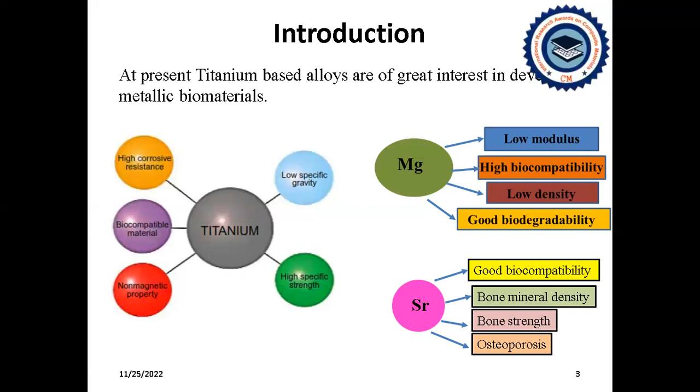The addition of strontium and magnesium to the titanium alloy not only increases biocompatibility, it also helps in corrosion resistance and degradation, and it slows down the rate of degradation. Therefore, the possible application of the ternary titanium, magnesium, strontium alloy with high strength and low density as biomaterials is attractive. Hence, this investigation is carried out.

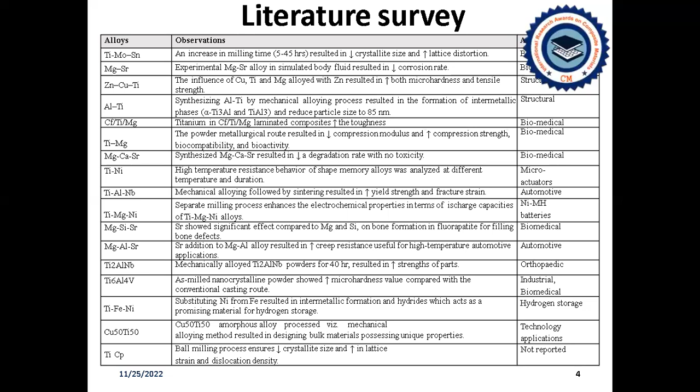In developing the Ti-Mg-Sr ternary alloy using the high energetic ball milling process for biomedical application. And the objectives of the work goes like this.

The first is to synthesize the nanostructured titanium, magnesium, strontium alloy by mechanical alloying technique, and consolidate the alloyed powder by cold isostatic compaction, to study the effects of structural parameters, phase identification, and quantification during mechanical alloying using XRD technique. Also to study the alloy powder's compositional and surface morphology using scanning electron microscope with energy dispersive spectroscopy during mechanical alloying.

Also, in order to find out the crystal structure, that is the structural parameter, of the alloyed powder as well as the compact sample, it is examined using transmission electron microscopy, that is TEM analysis is carried out to know the crystal structure of the alloyed powder as well as the compact sample.

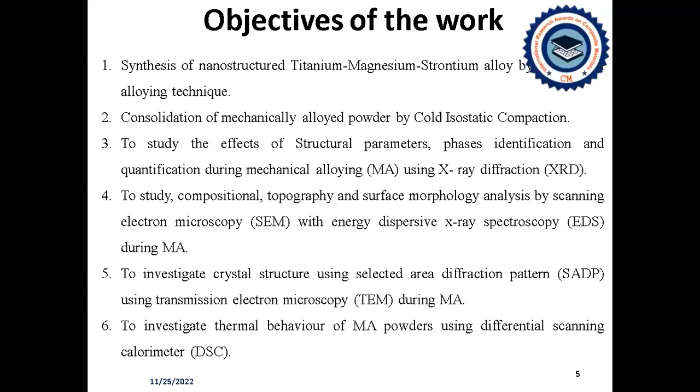Also, to investigate the thermal behavior of the alloyed powder along with the compact sample, a differential scanning calorimeter was used for the thermal investigation of the alloyed powder as well as the compact sample.

Experimental work. The mechanical alloying is one of the most important techniques. It is an effective way to improve atomic interdiffusion through a continuous cycle of flattening, cold welding, and fracturing of powder particles, which is possible only by the route of mechanical alloying.

Hence, the elemental powders of titanium, magnesium and strontium in the atomic ratio 70:10:20 are ball milled in an inert gas atmosphere at 200 rpm using tungsten carbide as the milling media, with a ball to powder weight ratio of 10:1.

It is mechanically alloyed using the high energetic ball milling process, and later the alloyed powder sample was subjected to structural investigation using the X-ray diffractometer.

Using the X-ray diffractometer technique, the thermal behavior of the alloyed powder and the compact sample was determined from room temperature to 200 degrees Celsius using DSC. Topography and surface morphology were also evaluated by SEM and the TEM SADP pattern.

After alloying it for 30 hours, the alloyed powder particles were consolidated by cold isostatic pressure, and then similar characterization is performed in order to know the structural parameters and phase evolution of the compact sample.

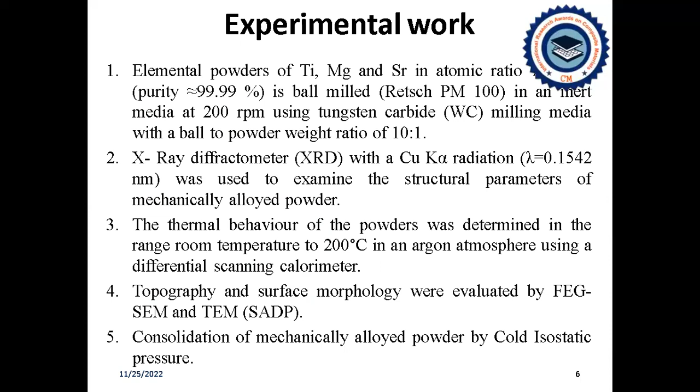This is a mechanical alloying technique. This is a high energetic planetary ball milling equipment which was used for the synthesis of the nanostructured TiMgSr powder using the mechanical alloying technique.

These are the ball milling specifications. The table shows the ball milling specifications: ball to powder weight ratio 10 is to 1 milling media, milling speed around 200 rpm, and ball material and vial material are the same, tungsten carbide.

Container volume capacity is 250 ml. Each ball diameter is around 10 millimeters, and weight of each ball is around 7.5 grams. The number of balls used for the milling process was 99, with a total weight of balls of 742.5 grams. Total milling time carried out was for a duration of 30 hours.

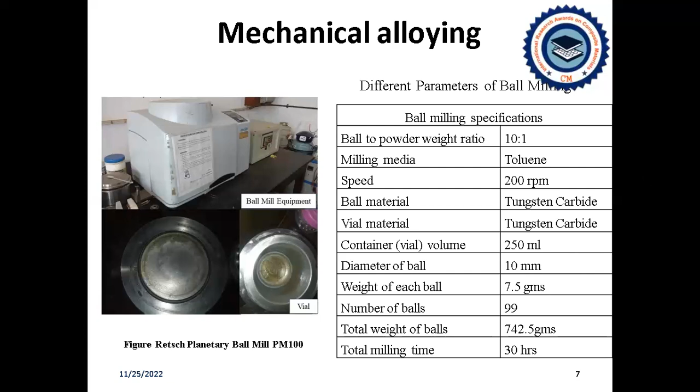This consolidation of powder was performed using a hydraulic press at a pressure of 500 megapascals. The powder was compacted, and the cylindrical compact dimension was 10 mm in diameter and 10 mm in height. After this cold compaction, it is dried at room temperature.

Then the green pellet was taken out from the die, and the compact sample is subjected to microwave sintering at a temperature of 300 degrees Celsius in a microwave furnace for 1 hour duration.

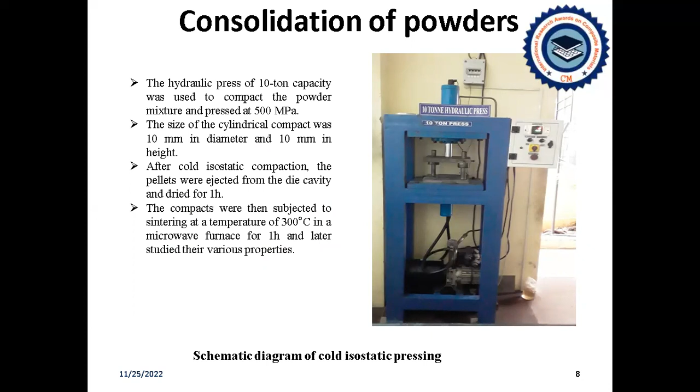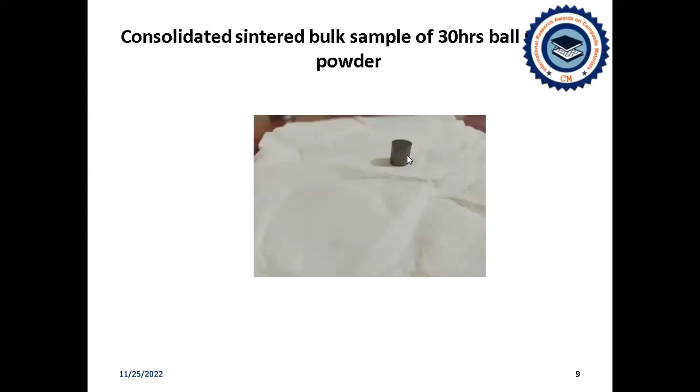Later, the compact sample was characterized to know its structure and properties. This picture shows the bulk compact sample which was synthesized from the 30 hours of ball milled powder.

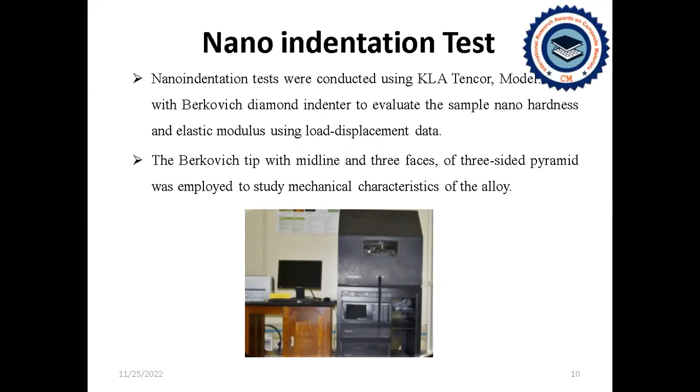Nano indentation test was carried out in order to study the mechanical properties of the compact sample, particularly the hardness as well as the Young's modulus.

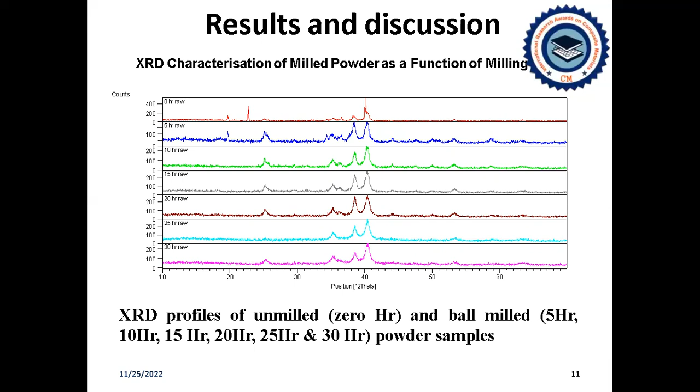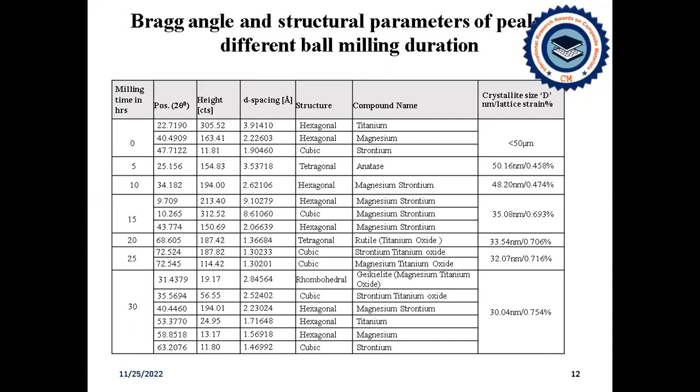Micron size of the powder particles was in microns. Later it was reduced to 30 nanometers because of the ball milling process, and also due to mechanical alloying, the binary phases formed at the end of 30 hours of ball milling duration.

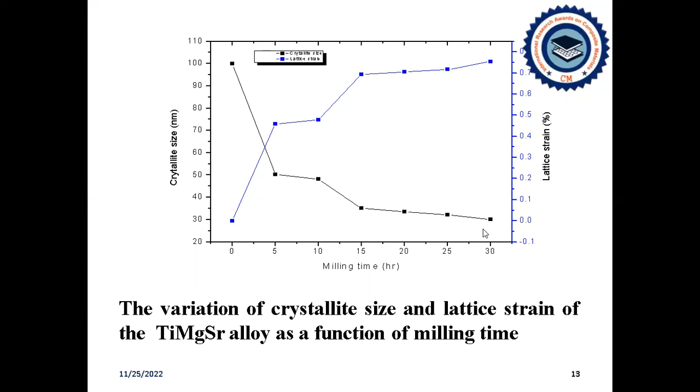This graph shows the variation of crystallite size versus milling time. As the milling progresses to 30 hours of ball milling duration, the crystallite size goes on and has reduced, and the blue color curve shows the lattice strain increases as the crystallite size reduces due to the increase in the ball milling duration.

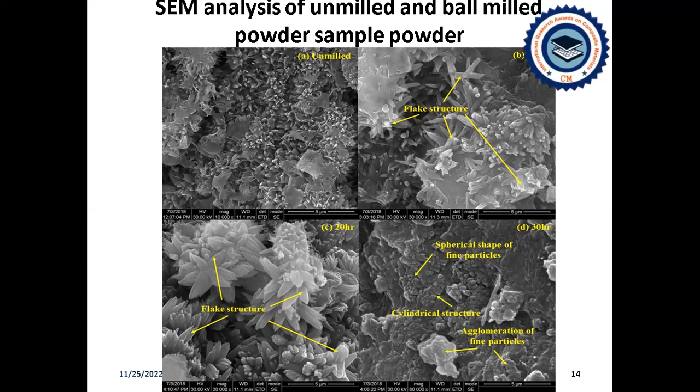This SEM analysis of the unmilled and ball milled powder sample represents the unmilled powder sample where the powders are seen, and as the milling progresses up to 10, 20, and 30 hours, the micrographs show the flake structure of the powder particles and the agglomeration of the powder particles, along with the cylindrical structure and spherical shape of the fine powder particles due to the cycle of fracturing, cold welding, and flattening of the powder particles.

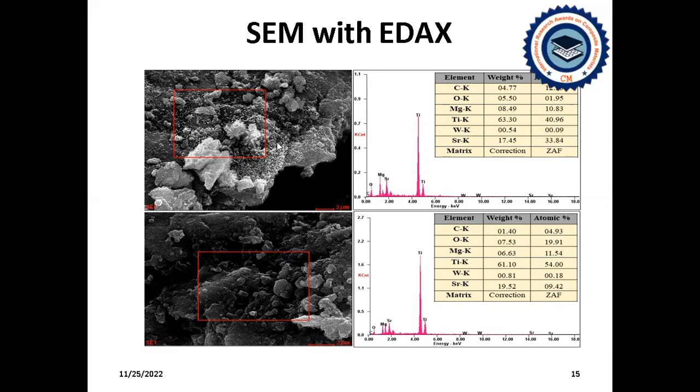The results were confirmed with the help of EDAX, as we can observe the composition of each element was present in the ball milled powder sample.

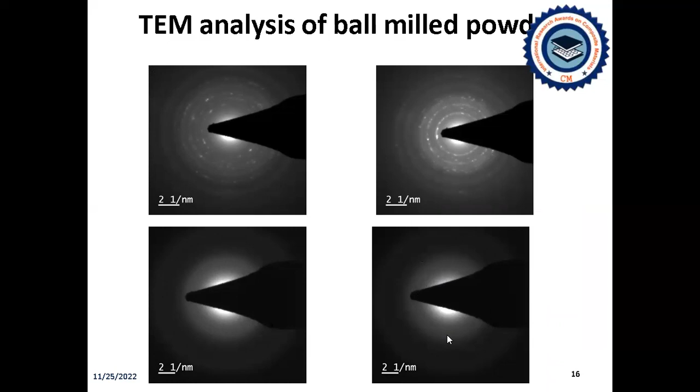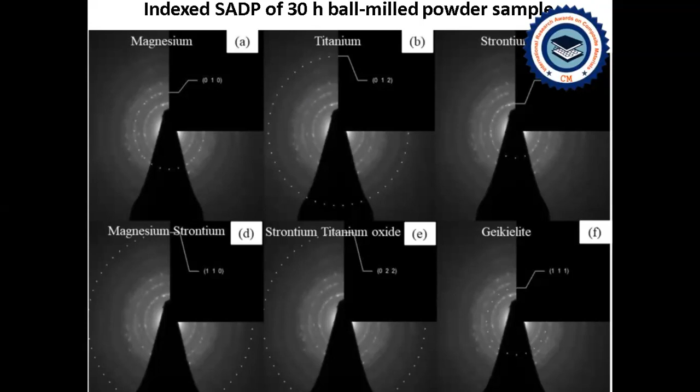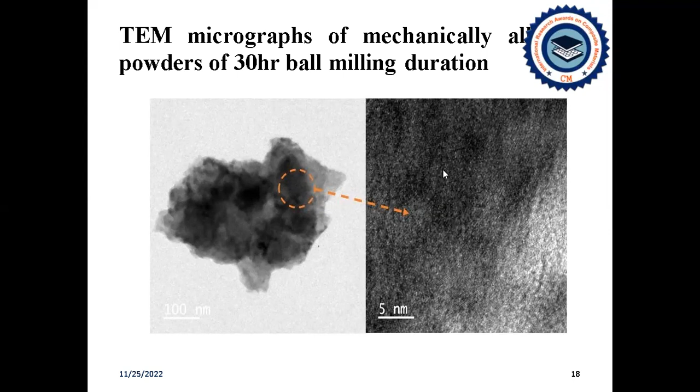This micrograph of mechanically alloyed powders of 30-hour ball milling duration shows the small minute particles that are present, which indicates the nano size of particles present in the ball mill powder sample.

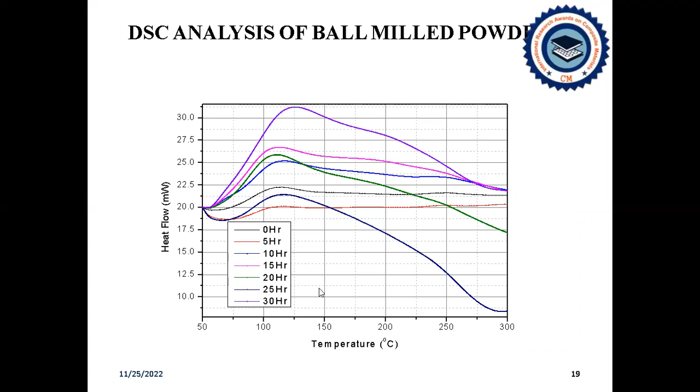When it comes to the DSC analysis of ball mill powder, it can be observed that the heat flow occurs around a temperature of 110 to 120 degrees Celsius, where the phase transition from crystalline to amorphous structure has taken place at the temperature range of 100 to 150 degrees Celsius, which suggests the formation of new phases at the cost of the ball milling process.

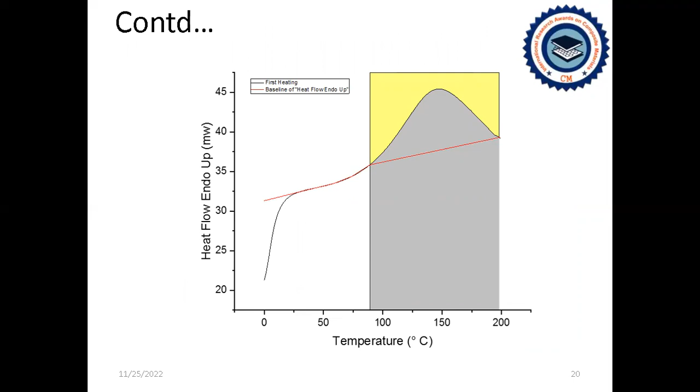This shows the curve of the heat flow endothermic reaction that has taken place during the ball milling process, and the phase transformation that has taken place during the ball milling process.

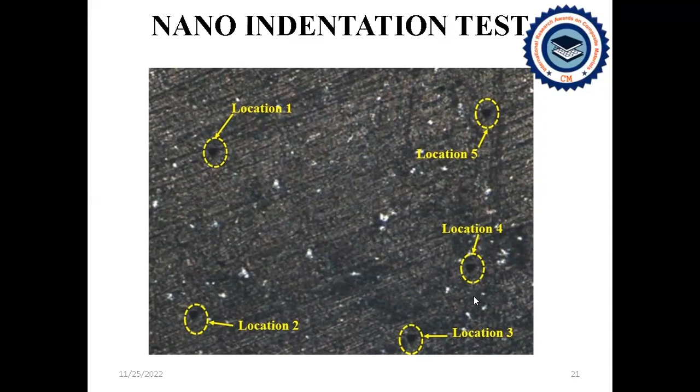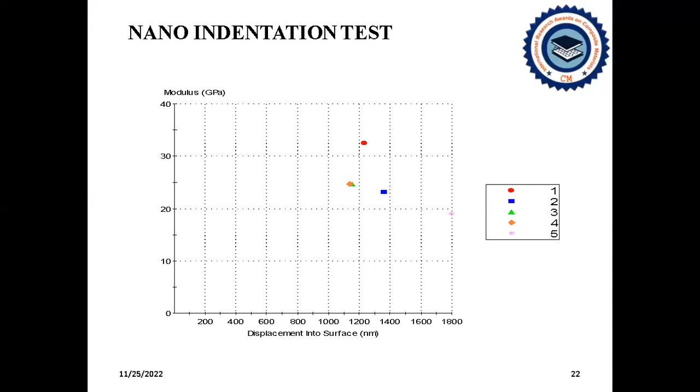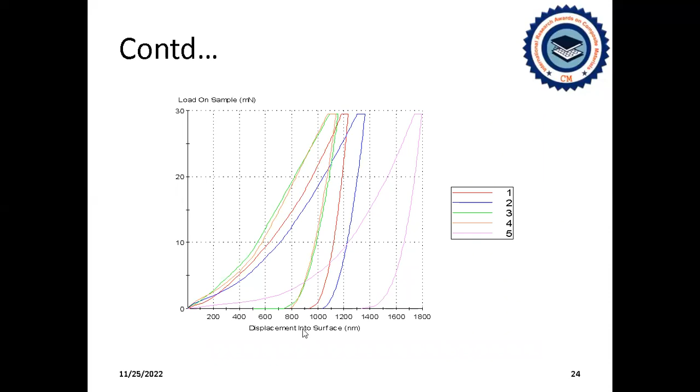The average modulus of 24.814 gigapascals was found, and hardness of 0.84 gigapascals was found. This is the mean value from the five locations, as well as the load at maximum, which was 30 millinewtons.

We found a low Young's modulus, which is favorable for biomedical implants, since low modulus titanium alloys will benefit as an implant material for biomedical applications. If it is a high modulus, then it will end up with the stress shielding effect. So low modulus titanium alloys are preferred for implant materials in biomedical applications.

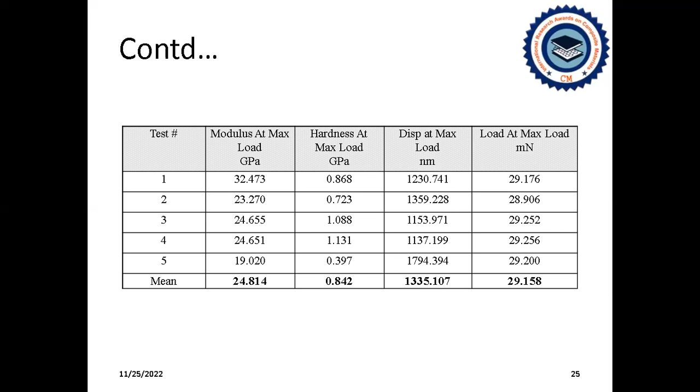In our present investigation, we got a low modulus value of 24.8 gigapascal compared with other titanium-based alloys, and this alloy is found to be most favorable for biomedical applications as an implant material.

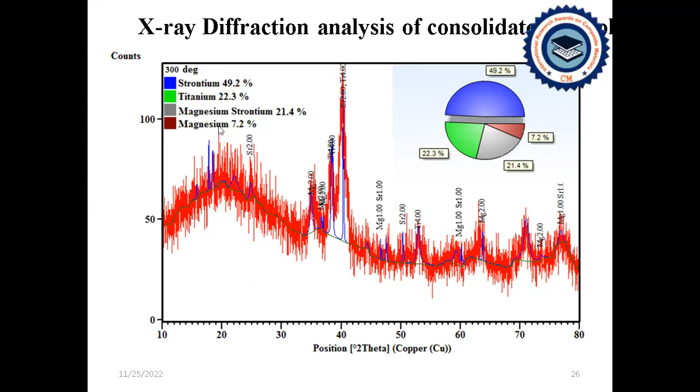This is the XRD analysis of the consolidated compact sample, where it shows similar phases which are present in the ball milled powder for 30 hours duration, that is magnesium strontium along with magnesium strontium binary phase. We have the elemental phases of titanium, magnesium, and strontium.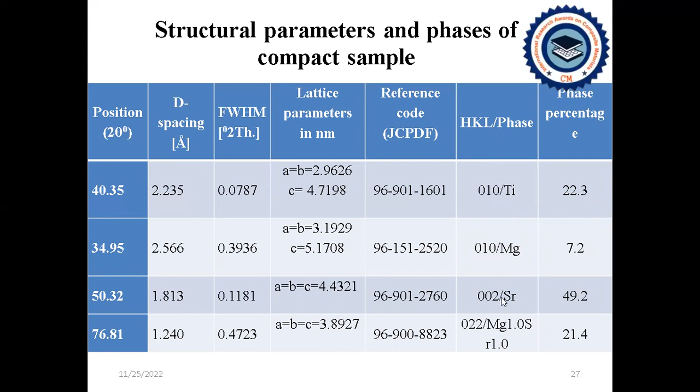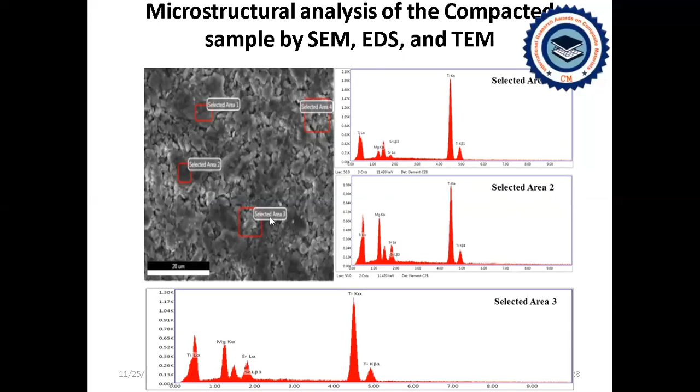This table represents the structural parameters and phases of the consolidated sample, with the HKL factors along with the phase percentages. This microstructural analysis of the compacted sample by SEM with EDS represents the elemental composition that is similar to the elements present in the ball milled sample.

The TEM analysis of the compact sample shows diffraction rings with small star-like spots on each ring, which represent the phases present in the ball milled powder sample. These are the nano grains that we can observe in the compact sample, where we retained the nanostructure upon sintering the sample.

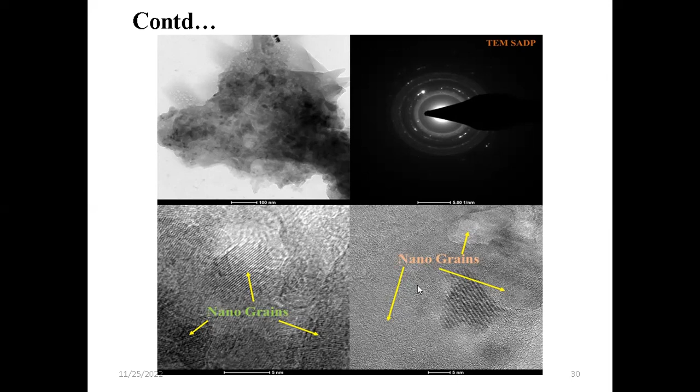Normally, grain growth occurs in particles, but since we sintered the sample at low temperature, we were able to retain the nanostructure even after the sintering process. That is indicated by the nano grains in the TEM images in the TEM characterization analysis of the compact sample.

These are the indexed TEM SADP patterns of the compact consolidated sample, where each diffraction ring shows the crystallite phases, which represent the elements present that are identical with the elements of the XRD characterization.

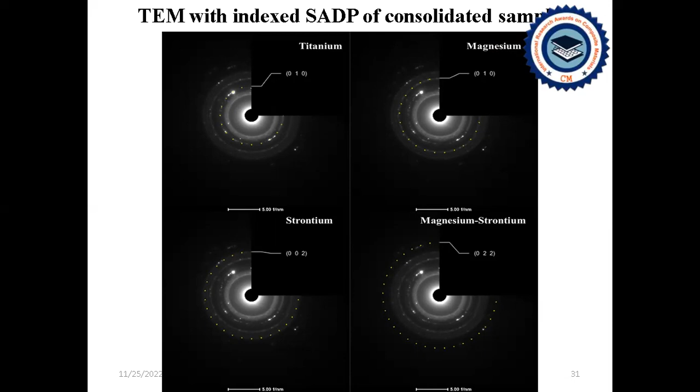Conclusions. From the XRD study, we conclude that at the early stage of the ball milling process, narrow peaks indicate the elemental powders, and the intermetallic compound, that is MgSr or MgTiO3, is formed at the end of 30 hours of ball milling duration.

This is because of the ballistic diffusion of magnesium atoms into the crystal structure of titanium, and the shifting of the diffraction peaks to higher Bragg angles. It suggests that this is a phenomenon related to the formation of new phases.

However, distinctive phases have emerged during the ball milling phenomenon, which suggests that this is all because of the severe plastic deformation that occurs during the ball milling process, helping distinct phases to emerge as a result of the mechanical alloying process.

Regarding the SEM and TEM study, the morphology of the unmilled powder shows a more irregular shape without any deformation, and the changes in the form of the powder are due to the deformation seen by the flattening and typical popcorn structure from the increase in ball milling duration.

The dark spots in the SADP image indicate nanocrystalline grains, and the smoky image always suggests that amorphization has taken place from the crystalline to amorphous structure, as the transformation occurred during the ball milling process.

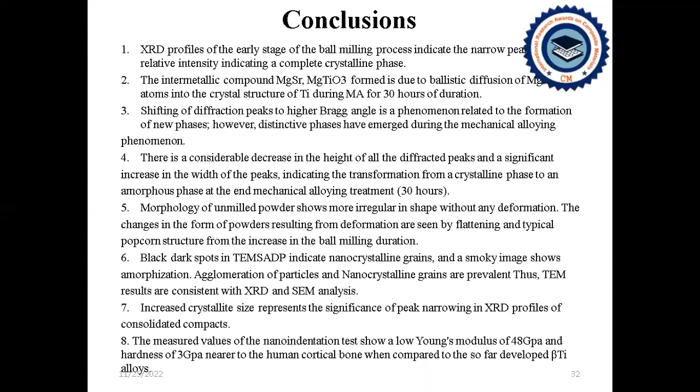So in our present investigation, the developed titanium magnesium strontium alloy, which possesses low Young's modulus, is preferred and favorable for biomedical implant applications.